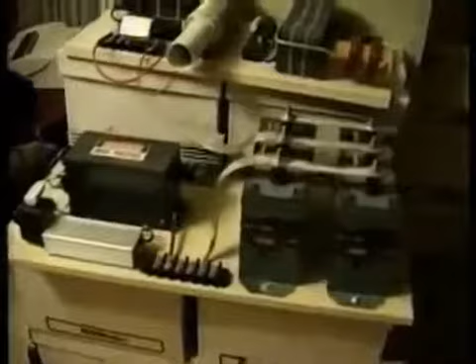So you can see that it has the same components that the other device has. They're just scaled up somewhat. Have you used this one here? I've had it. I've started it, and I know that I've tested it, but I haven't ran this particular one for any extended period of time, except to just start it.

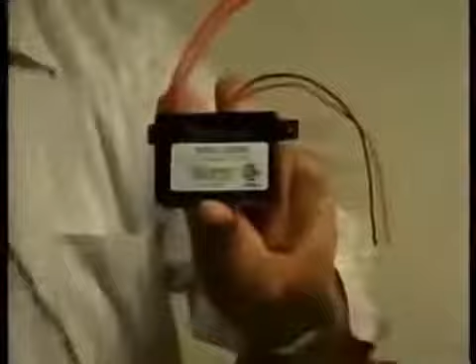L1 or input coil, and we're going to run this. Since this is alternating current, it's neither plus or minus; what it's going to be doing is coming over here and into here.

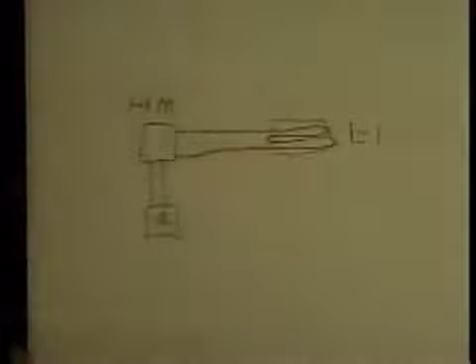And everything works fine. And we've got an L1 coil, and it's all working just fine. At this point, it's running at 35,000 cycles per second.

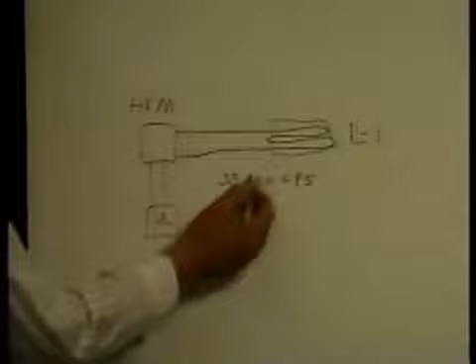The fact that the length of the wires that go on this coil here are basically irrelevant, because it's being pumped by the high voltage device here, and that's going to set the frequency. The length of the wires are not going to have anything to do with it. So you don't have to know how to tune it to do this.

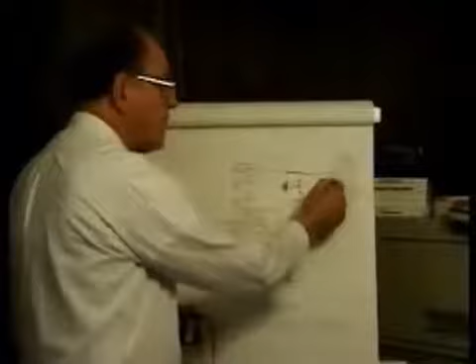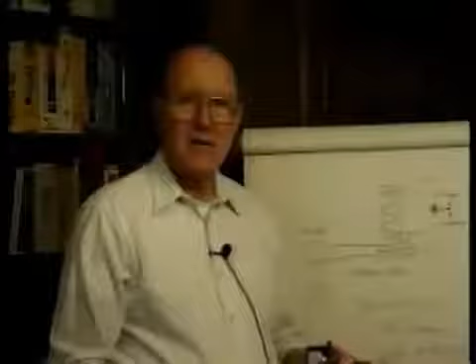Capacitance and resistance and other types of things, which will tell you what approximate frequency you'll end up with. Now, in the case of American Radio Relay League, you're going to be off the end of the chart, and you're going to have to take a little piece of paper and make the grid and extend the chart over about an inch or so and about an inch or so down in order to get, say, 60 cycles or 120 or whatever it is you want. But you can do that real easy.

So anyhow, we've got through our 12 volts, and none of the electrons from the 12-volt battery have left the high voltage module.

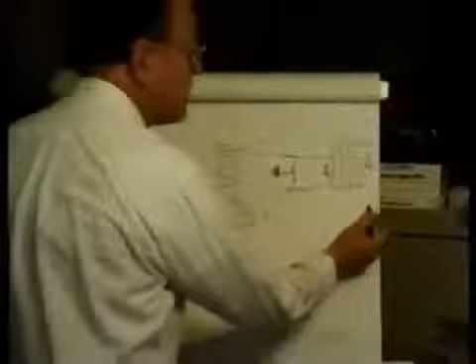In between the earth grounding and the other pole of that transformer. And you're going to have to also put some sort of voltage control on this thing here, and that will be a varistor, V-A-R-I-S-T-O-R. And what that is, like on your computer where you have a voltage control thing that keeps the spikes from coming in, it looks like a little capacitor, but it's not.

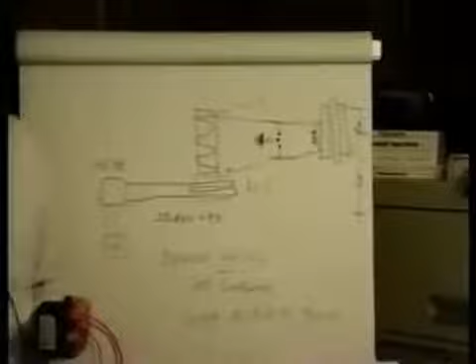Now, Radio Shack has a book on electronic tables and such, and you can use the charts in it. Okay.